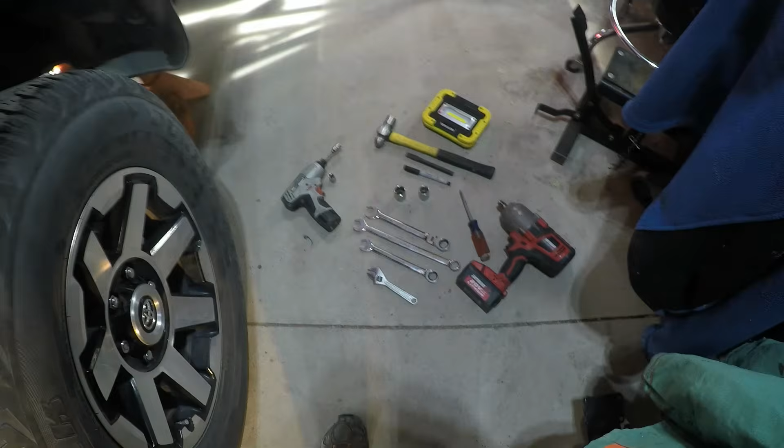Okay, so here's all the tools that it took for this job. 10 millimeter and 12 millimeter 3/8 drive with a little electric impact just to take off the front splash guard, and then a small crescent just to hold the top of the shock, 17 millimeter long arm just to break that upper old factory nut loose, 19 millimeter.

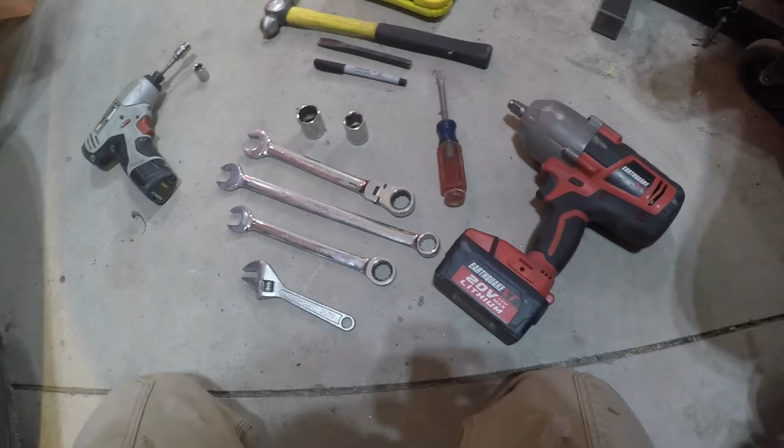This I used to install the top nut on the new shocks because it comes with a bigger nut. 19 millimeter half-inch socket, 22 millimeter half-inch socket. That was just to relocate the snap rings and also to help me maneuver the ball joint mount around to get it to line up when we were putting the ball joint mount back onto the knuckle. And then electric impact makes it nice. You don't have to have that, of course. That just makes removing the bolts a little faster and smoother. And then, of course, some lighting.

This is just for marking the cams for the alignment, so you want to make sure that you're not knocking those out of alignment when you loosen those lower inner control arm bolts. And you have to do that whether or not you're using the spring compressor tool. You have to loosen those bolts enough that the lower control arm will droop out enough to get the whole thing out. It doesn't matter if you're using the vehicle as a spring compressor or using a spring compressor tool, you still have to do that.

And then of course a little chisel just to make a little punch mark on the side of the cam, not on the cam itself, and a little hammer to do that. That's it. And of course you need jack stands and a jack, and a torque wrench.

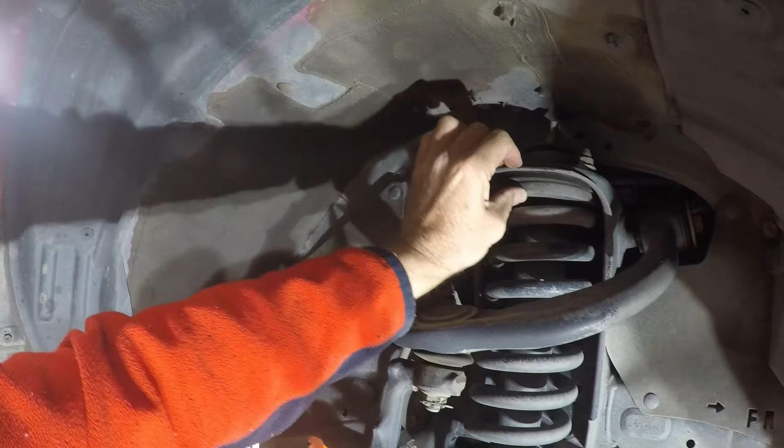We got three 14 millimeters here, here, and here holding the top of the shock tower on. We have the 17 millimeter here that actually holds the tension on the spring. And this is what holds the other side of the spring, of course. This is a 19 millimeter here. It looks like we might have to back it up with a wrench over there. And there's a couple 19 millimeter bolts here.

This is obviously the lower ball joint, right? And this is a ball joint locator, and it separates right here and then right here on the other side as well. So if you pull this 19 millimeter bolt here and this one right here, this whole thing will fall away. So you're not loosening your ball joint, you're just loosening the mounts.

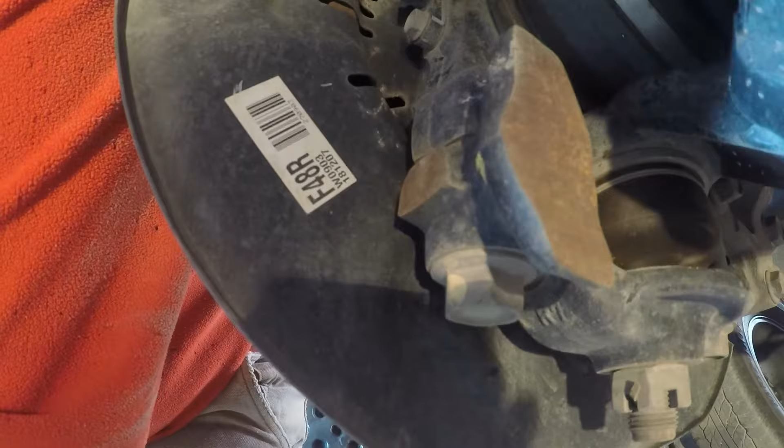And this is how I did it on my 2002 Tundra a couple times when I changed struts on that. We had that truck for 250,000 miles, so we did this a few times. Even changed CV axles once on it. So it was a good truck. And it was still running when we sold it.

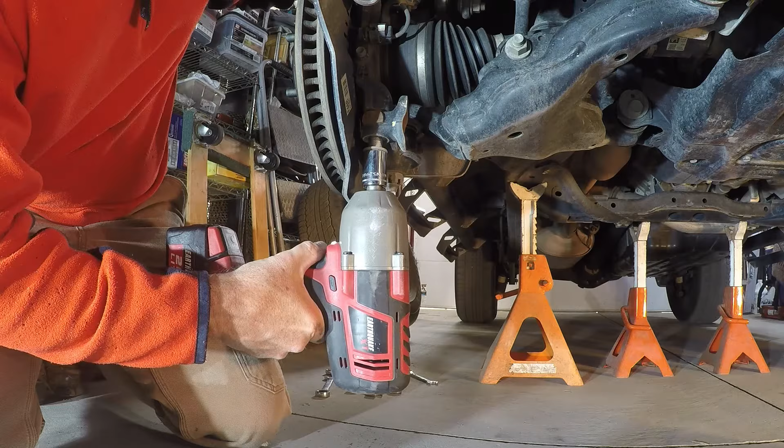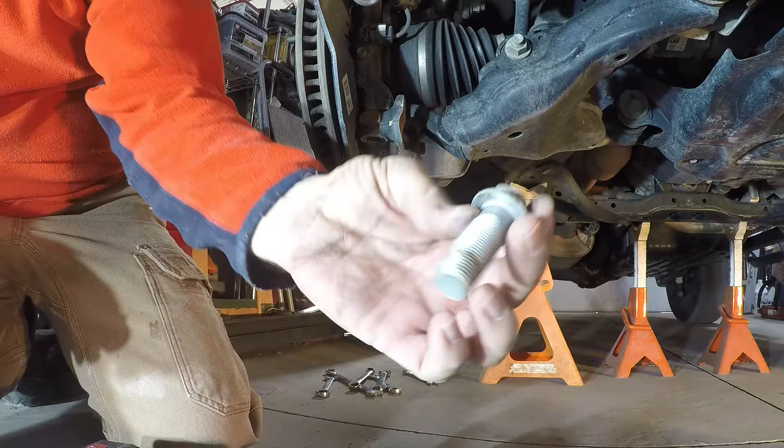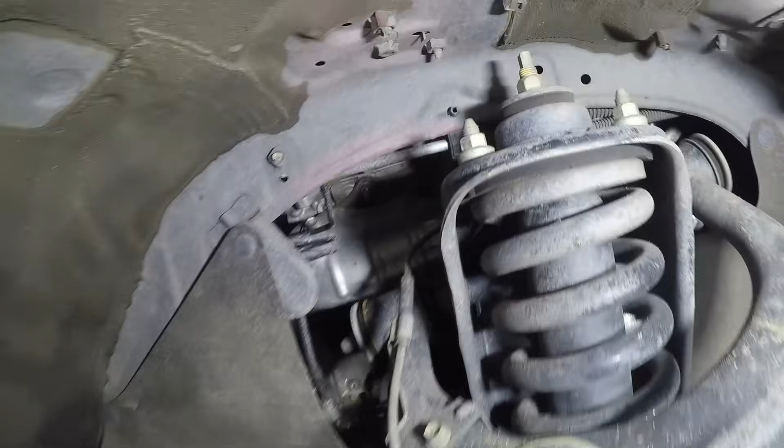Now we're going to put the jack under this before we pull this last bolt out. So now we're going to loosen this top center nut, and hopefully then the jack will be able to lower that arm down to the ground. Okay, so we're using a 17 millimeter long arm and then just an adjustable wrench to hold the top part right there. Breaking it loose with this.

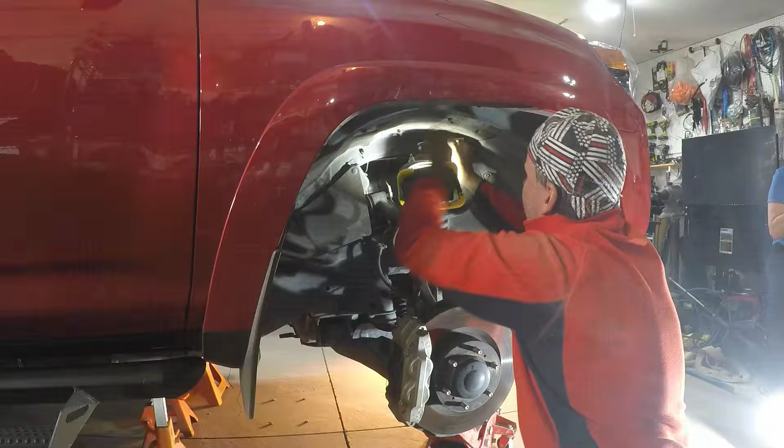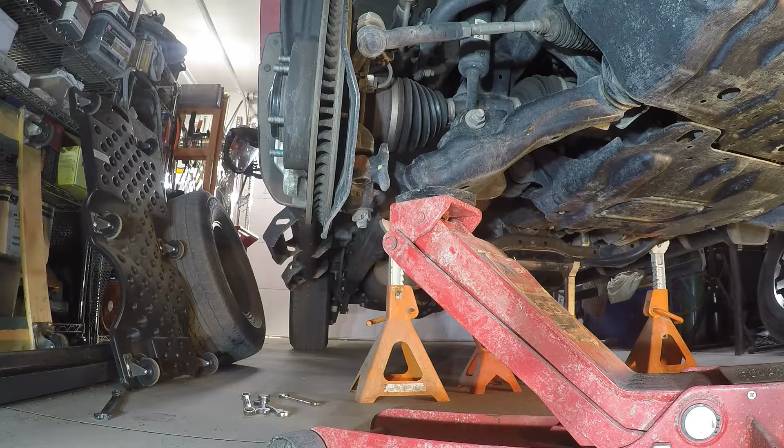Now 17mm ratchet. Now, before we loosen that nut all the way, I want to make sure that the jack is tight against the bottom of this lower control arm right here. So we're going to put a little bit of tension on it. Not going to raise the vehicle off the jack stands, but just enough to make sure that it's tight. Make sure the jack handle is nice and tight so that it won't let off or slip.

Now, the good part about this tells me the tension's off of it, right? Because I'm still loosening it, but it's unthreading by hand. That means the spring isn't trying to pull that down and pull it out. Okay, so that's good. Now what we might do just for safety here is just put a few turns on that. Leave that little bit of gap there. Okay, everything's loose there. We're going to come down here and lower this. And as I lower it, let's watch that gap right there.

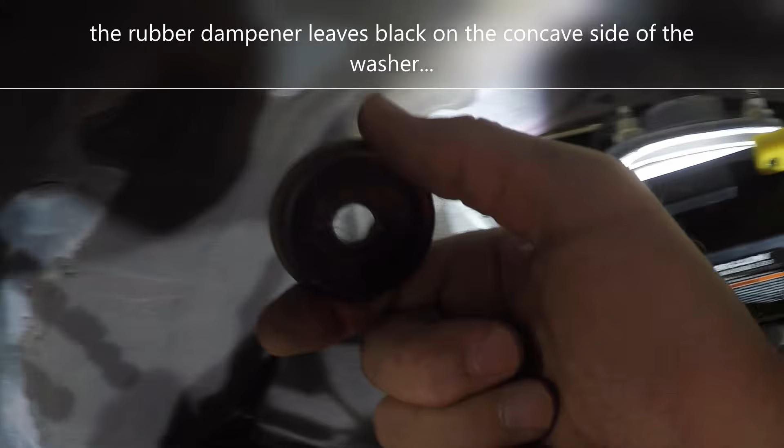Okay, back underneath the fender, we're going to pull this nut off here. Pull the washer off. Sorry, I know it's hard to see with that light back there. Pull the rubber bumper off. Maybe. Okay, it's nice and clean up there now. Okay, here goes. We're going to lower the jack now.

Hold on to your butts. That was anticlimactic.

Spring tension can't be all the way off, is it? No, I'm going to have to loosen these stupid lower arms. I didn't want to have to do that.

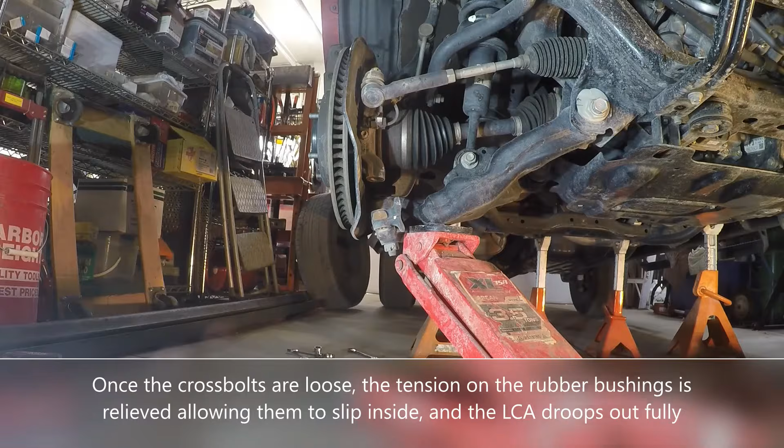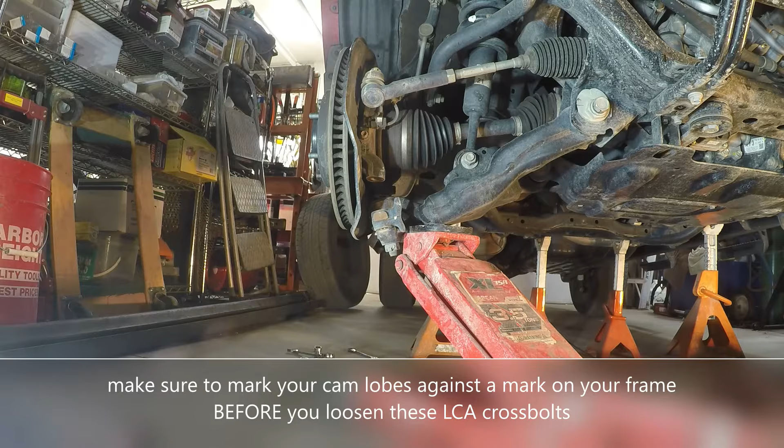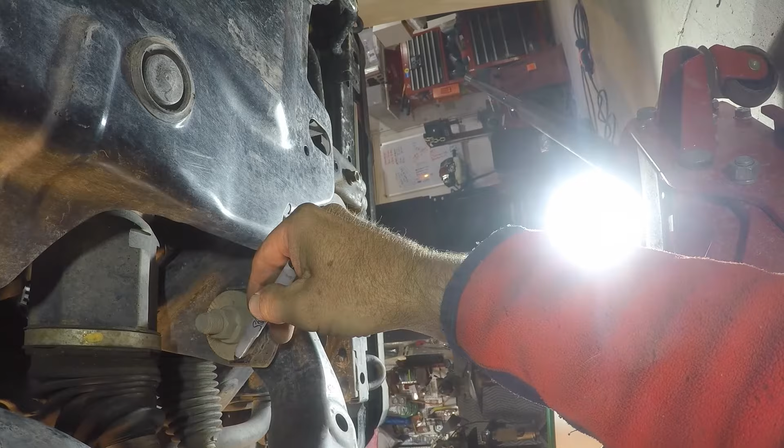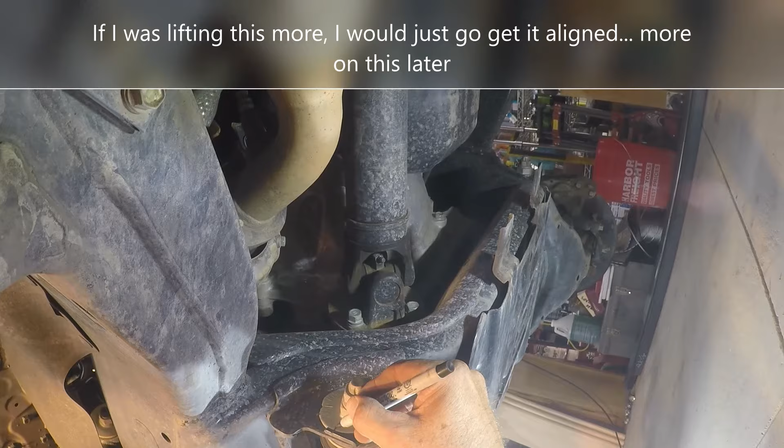Okay, this one actually has a little hash mark you can feel with your fingernail in it, so I just made a little mark in the middle of it and then made a mark here on the cam. Okay, good. Okay, so here we just made a little chisel mark like that because there's no mark on this, and this just makes me feel a little bit better that it can be lined up right with that. Yep.

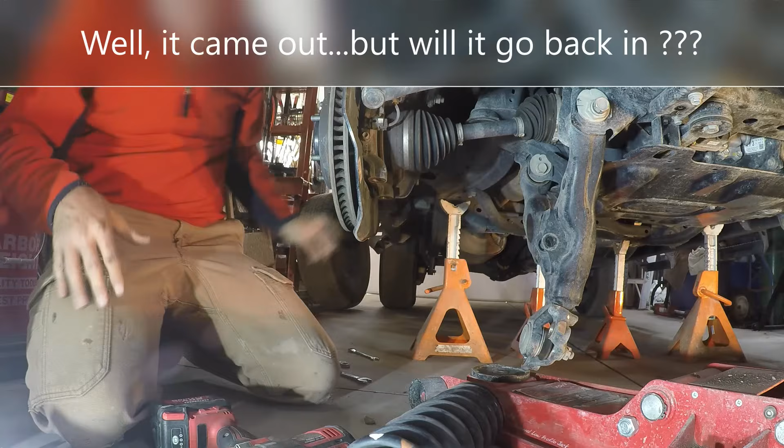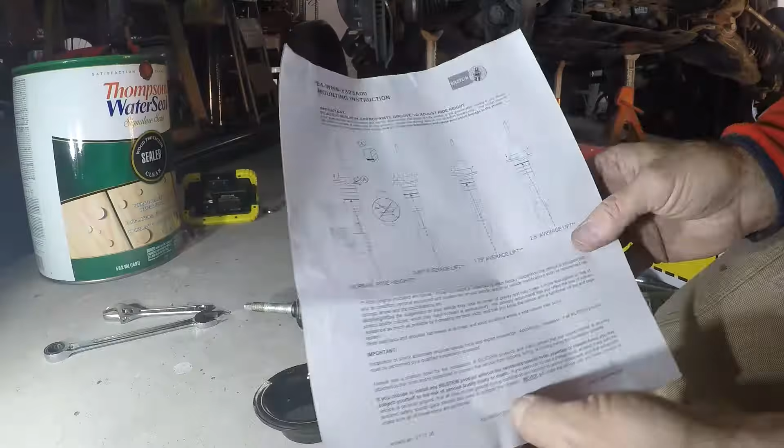Now up here, rubber bumper got left, and we can just leave it there. In the directions here, this isn't telling you how the parts go back together, but you just got to pay attention to how your originals come off and keep the parts in order, and then you can get it back together, because the instructions here don't talk about that.

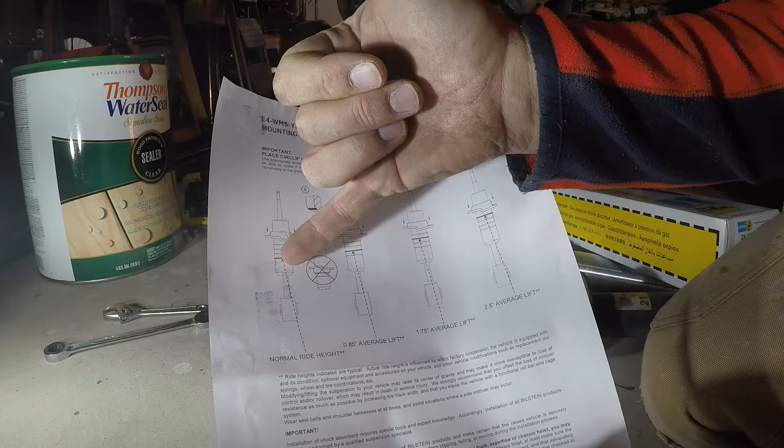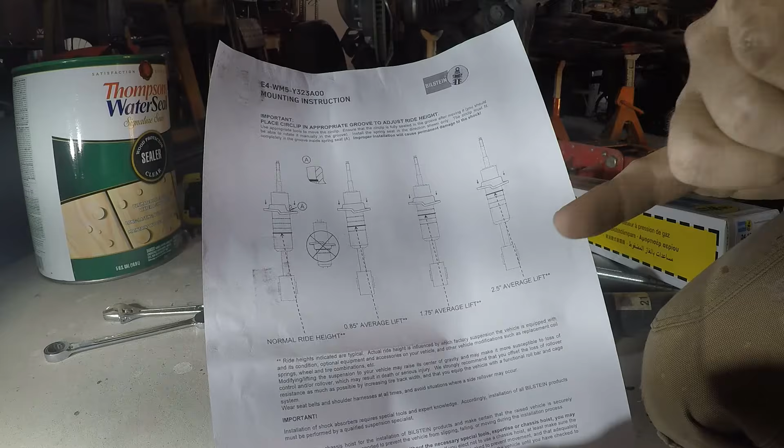So this is just explaining the clip height and what it does to your ride height. So the lowest clip position, of course, is normal ride height. That's your factory shock height. If you put it at the second position, that will give you 0.85 inch average lift. The third position is 1.75 inch, and fourth position is 2.5 inch average.

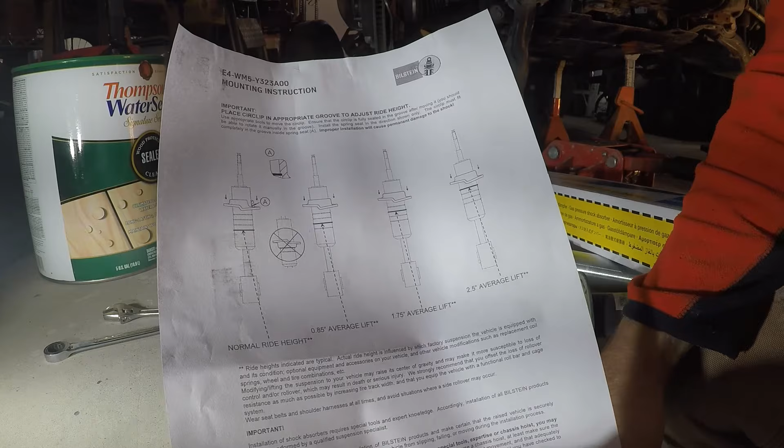So I'm not going to put it way up here. I'd like to. I've done that in the past on my Toyota Tundra. I did that, and it was awesome. It had a good ride height. It actually lifted the front end a little bit higher than the back end. It was kind of pre-runner style. It was kind of cool.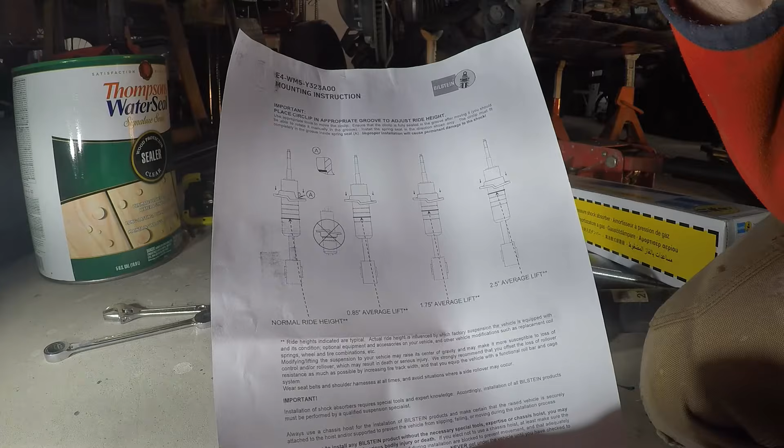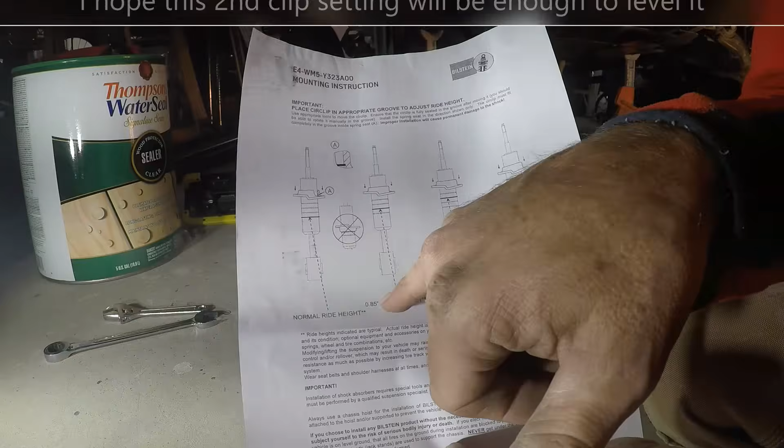But I think that really does increase the angle on the front CV axles. So I think that's going to increase the wear on those, maybe accelerate the wear. That's just my opinion. But I'm going to just put it on the second position here, 0.85 inch, just to give it a little bit of change.

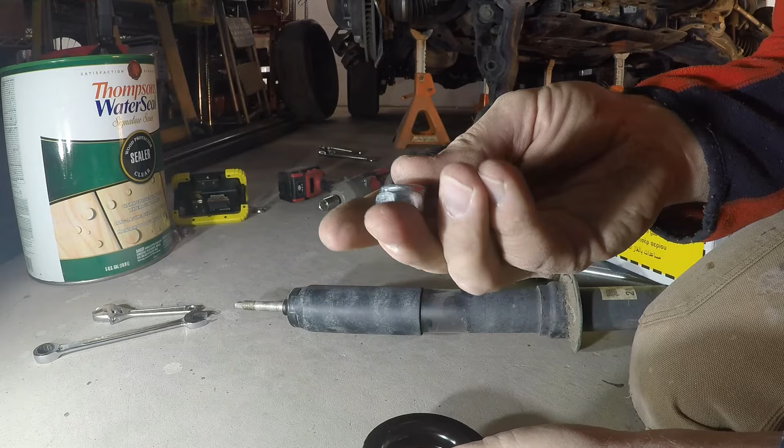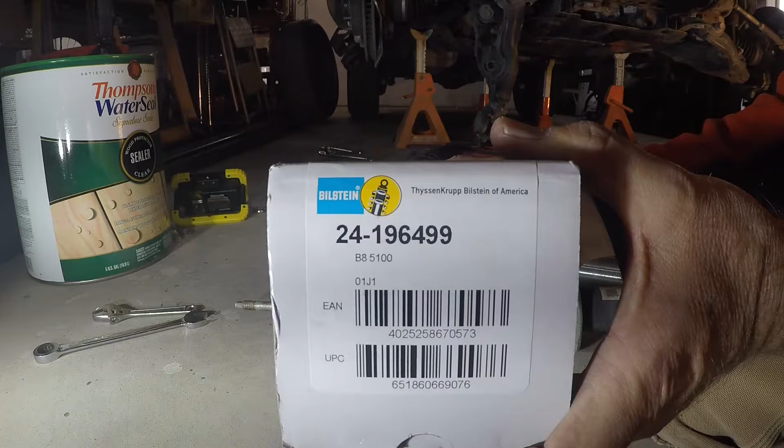Okay, now this is what comes in the bag with the shock. There's a new collar, there's a new nylon lock nut, there's a nylon insert there. That's cool. And this is the part number for this 2019 4Runner, 24-196499. Now we want to be careful here that we don't overbend this or overstretch it, right?

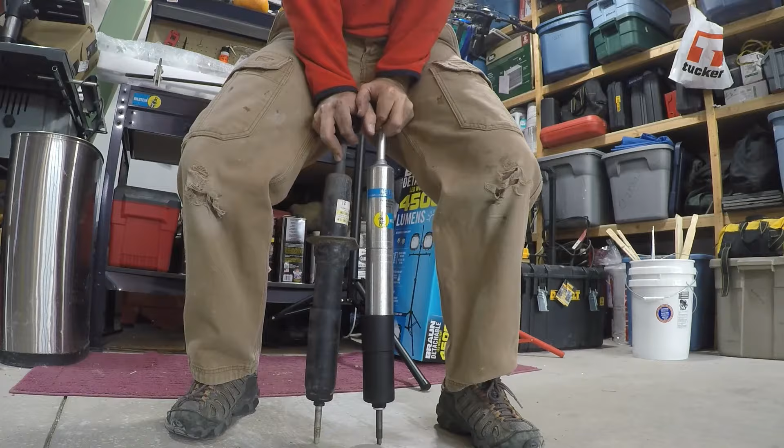Okay, we got it out of the groove. We're just going to slide it up here. The second position. Looks like it's in nicely. Let's just slide it around, make sure it slides around easily. Yep, looks like it's engaged. Okay, good. Okay, let's just see what the rebound is like on these. Okay, the Bilstein's definitely stiffer. They're both bottomed out. Here we go.

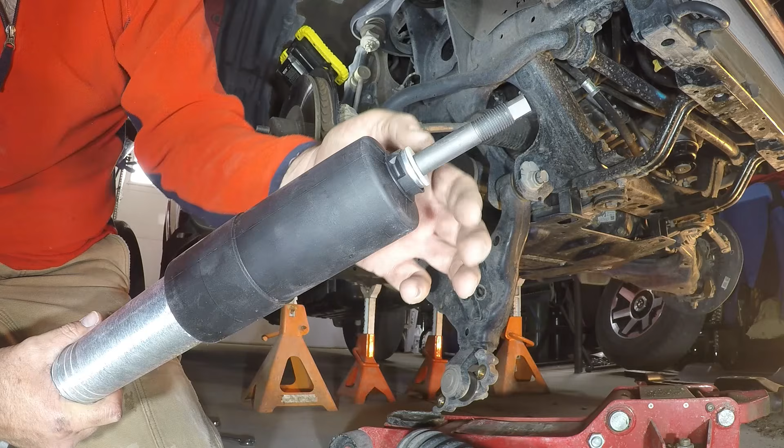Okay, so the factory one took more than twice as long. Good deal. Let's get these in. Okay, first thing we're going to do is put on the new parts. We're going to get rid of this little retainer. Slide this boot off. Okay, we've got our clip set in the second position there. We're going to take this piece, slide it on, wide part down. Okay.

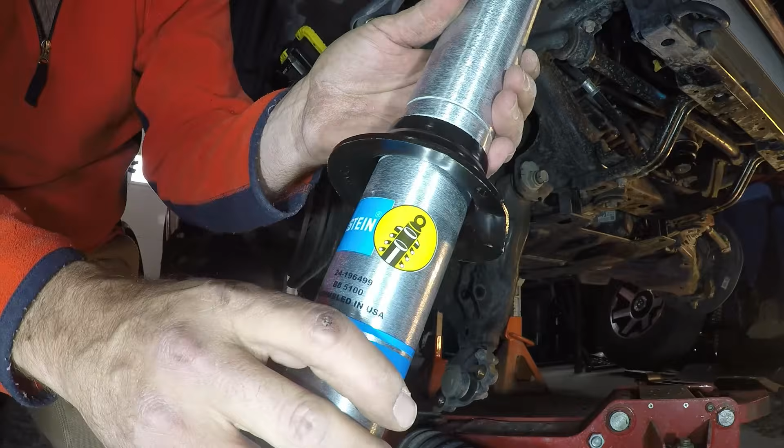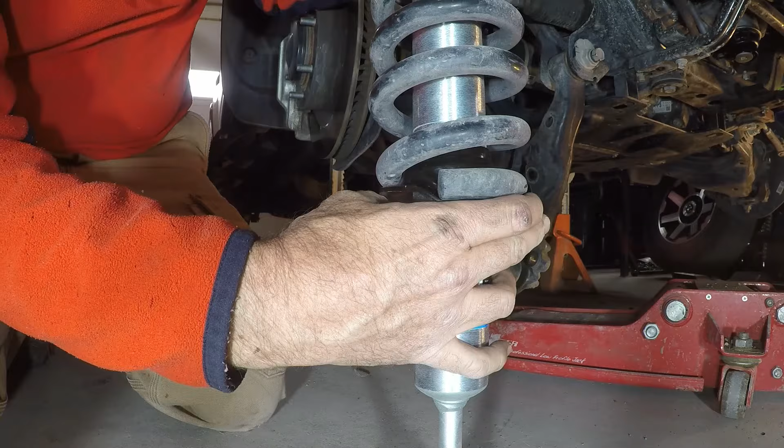Then we can go ahead and slide our boot back on, and then this can go on now too. Okay, we'll set our spring in place. It's important to get this engaged where the spring is lined up with this notch. Okay, like that. We index this down here, but it's probably going to move, so we need to make sure we recheck that after we get it up in position.

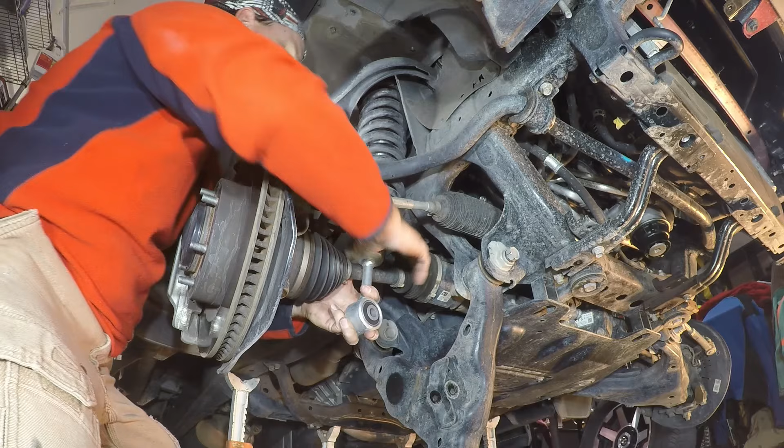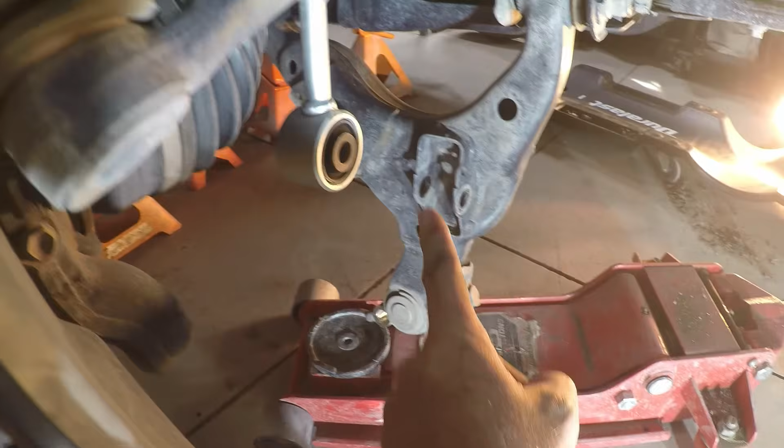You're going to check for the rubber washer. It's still there. It hasn't fallen out. That's good. Okay, so what we did was we just put the nut in the top there just to hold it in place. I can't push it any farther up, so we're going to use the fulcrum effect of the lower control arm down here to push up on this, to get it pushed up inside. Once we get that up inside, then we'll put these on right here. Okay. Okay.

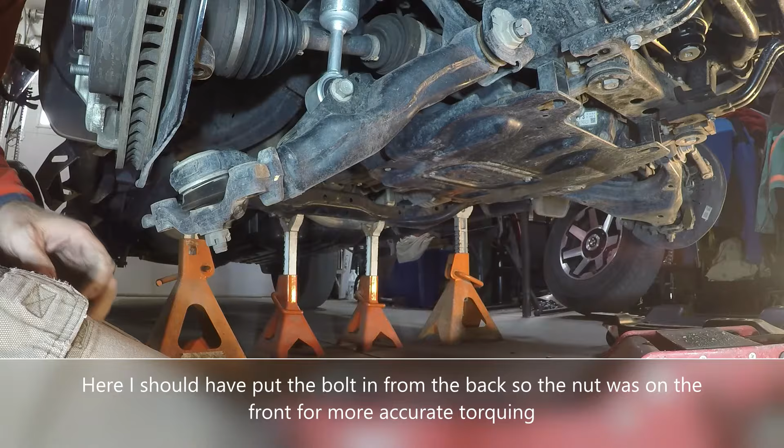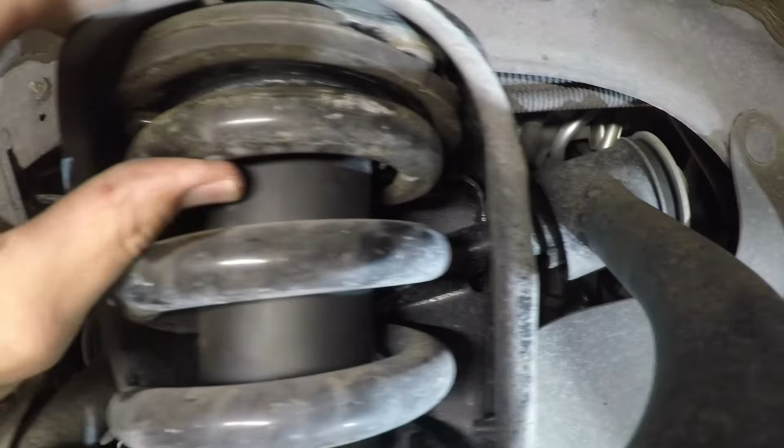All right, now what we need to do is keep this ball joint bracket lined up as we jack this up. We know it's going to line up there, because the top of the shock's already in the hole. It looks like the spring is engaged well in the collar, and going up the spring here to the top, it looks like the spring's engaged well within the rubber up here. And you can see that the nut got pushed up high, so that's awesome. Just what we needed. And we're going to take the nut off.

We're going to put the rubber bumper on. Then we're going to put the metal washer with the concave side down. And then we'll make sure we put the nylon lock nut with the nylon to the top, of course. To get that up there, we're going to snug that down and see if we can't pull this up a little bit further here.

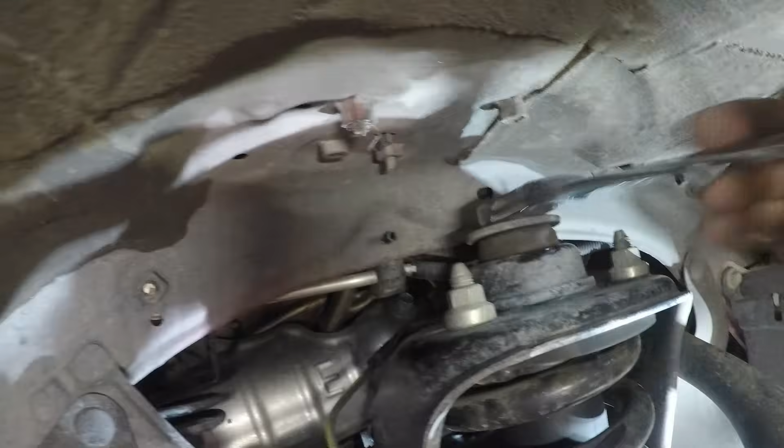Now that could be turning the top, it could be turning the whole threaded shaft, right? But it looks like it's not. That seems to be stationary right there. So we're going to keep running this down. Now it's starting to turn it, so I'll have to put a wrench on it. Okay, so we got the nut snug. This rubber's starting to squish out a little bit here, so we're going to stop right there. We don't want to crush the rubber, right? So it's starting to just bulge out a little bit. We're going to stop there.

And now when we weight the vehicle, that's going to compress the spring up, right? And that might push this up higher. This might loosen up. So after we put the wheels and tires on and put it back on the ground, we need to come back and make sure this isn't loose or clunking. And then when we drive it, we need to make sure when it droops out that we don't hear a clunk either, because that could be this loose right here.

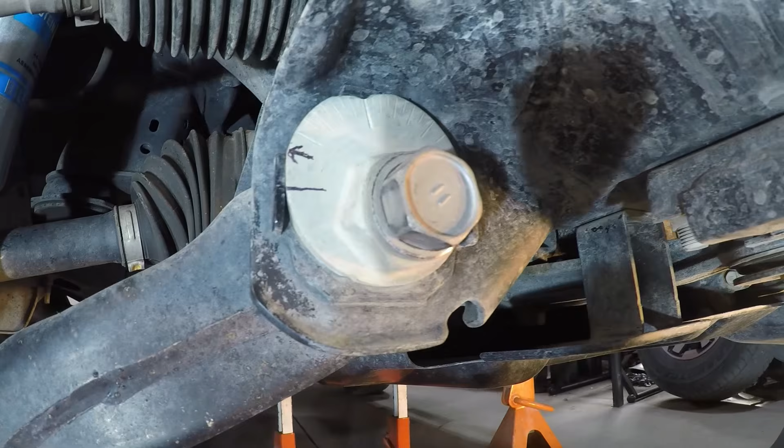The other reason you want to mark your alignment in a couple different positions is because when you loosen these bolts to drop this part right here, you might mess up the alignment. This cam might move. So you want to make sure it doesn't move. So just mark it, and then you know.

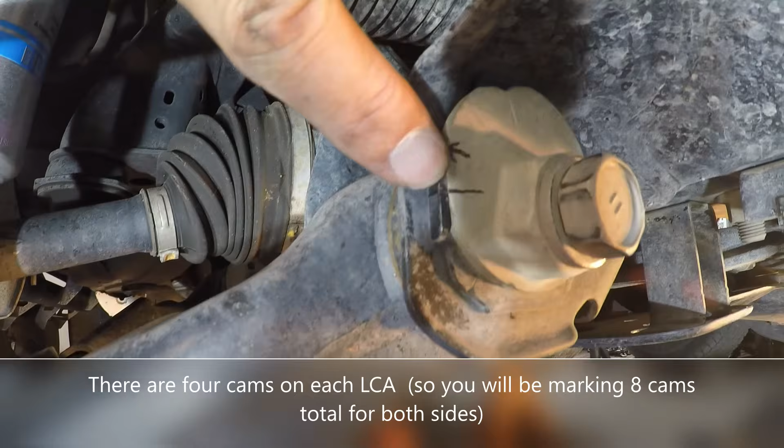It's easy to make a straight line across there like I did and mark a solid piece that you can reference it against. There's probably other indexing marks on here that you could use that would make it a little easier. So I marked a little arrow at the top of that black piece of metal right there, with the line across. Okay, now we're going to jack it up a little bit higher here and get the ball joint lined back up.

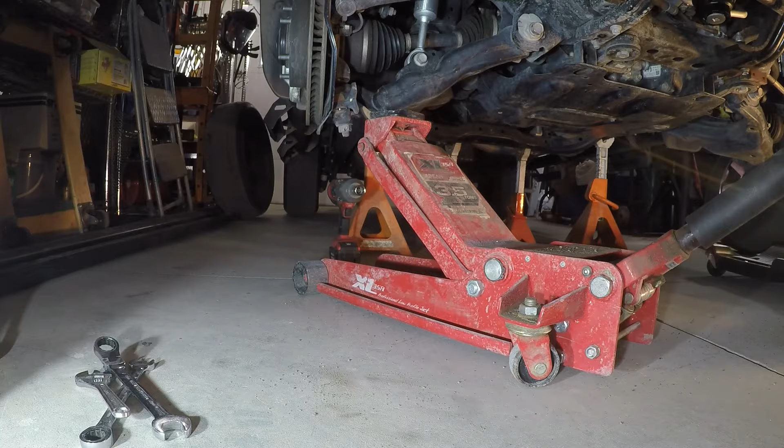Okay, so this moves around pretty easily by hand. It's not quite lining up though. Let's try to pull it that way just a little bit and see if that doesn't make a difference. Okay, that got it.

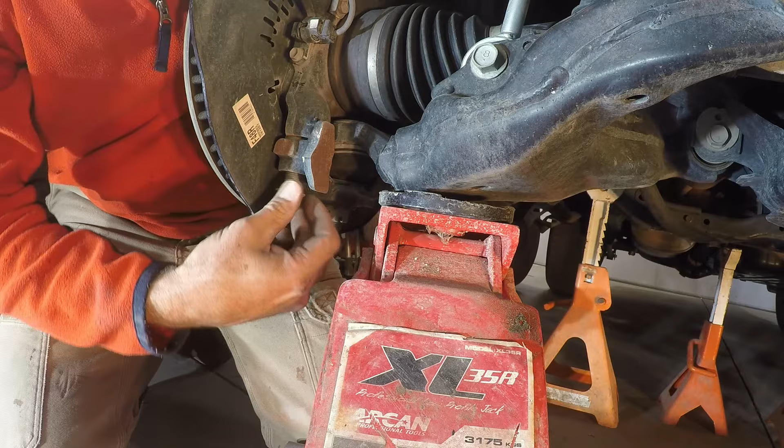Well, we'll just run it all the way by hand. Okay, good. Now we can start torquing stuff down. Okay, so these lower bolts, these two bolts we just put in that hold the ball joint mount in place, they're 118 foot-pounds. So we're going to roll this up to foot-pounds here.

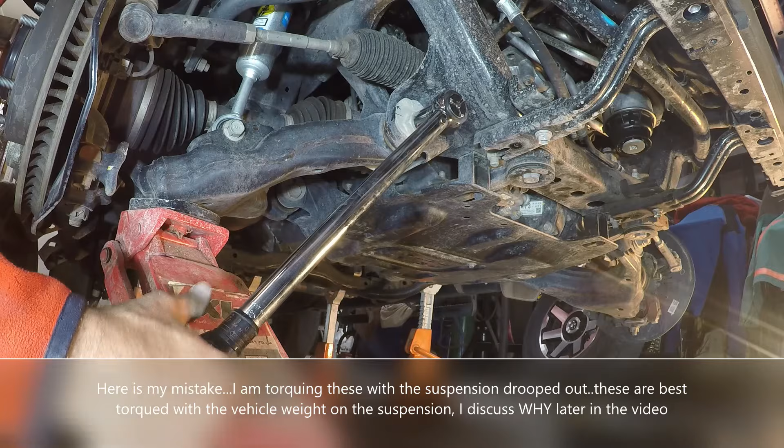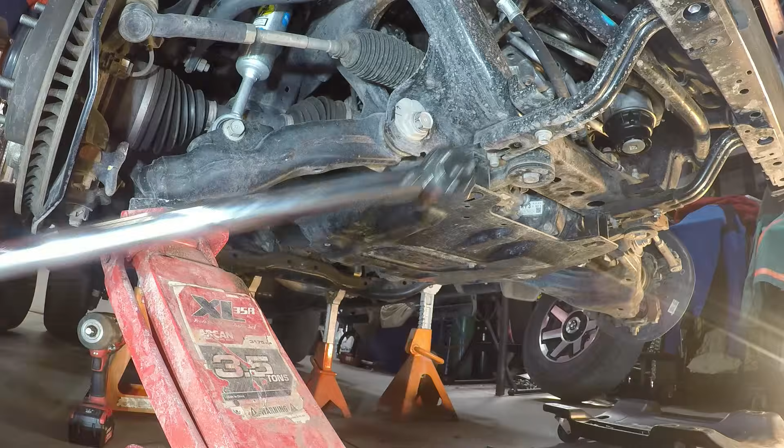Now, a couple potential problems that I can see with doing it this way. Of course, you're taking your own risk if you're going to do something vastly different than the way it's normally done, like I'm doing here. But I'm trying to manage that by knowing that, number one, I'm not going to get this torque to 18 foot-pounds like the manual says.

And the other thing is, when we're looking at the vehicle from the front here, I've got it on big jack stands there and there on the frame. I have these jack stands in the middle that are almost touching the frame that are backing it up should one of these fail and it comes straight down.

The risk is jacking up this side unweights this side of the vehicle as you're jacking this A-arm up. So I could see the vehicle move just a little bit as I was jacking this up to get that nut tightened up there at the top of the shock. And that could potentially shift the whole vehicle and cause it to fall. Okay, so that's definitely a risk, and a falling vehicle is no joke, right? You can die from that.

So this is a risk I'm taking. You're taking your own risk if you're doing it like this. This is just an example of how I'm doing it without a spring compressor tool. Spring compressor tools have their own risks. Some of the cheaper ones are kind of scary, and there's some videos you can see on YouTube of them failing. So that's risky too. Even if you have a professional one, anytime a spring is under tension, you're worried about that, right? So that can happen.

So let's just look at our jack stands here. I don't see them leaning. They haven't shifted. As far as the frame goes, the jack stands are still centered on the frame like I left them. And so I feel safe about that, but you got to be careful.

Okay, so I got to double check everything. I'm going to do the other side, and then I'm going to come back to this side and retorque everything. Just put the torque wrench on with the torque specs just to make sure that I'm happy with everything I took off. So I've got 2 bolts down here I took off. I had the bolt here. I had these that I loosened, that one and this one, those cams that I marked there and there. And then this one I'm having to hand tighten right here because I didn't take this part of the upper shock tower off. Okay.

So once I'm done here, I'm going to leave this wheel off for now. I'm going to come back over, retorque everything, make sure that all the bolts that I took off, I'm double checking and triple checking to make sure I torque them to the correct specification, and also that I didn't miss anything, okay? That I didn't leave anything off, that nothing's out of whack, out of alignment. So we're going to come back and double check all the torque specs.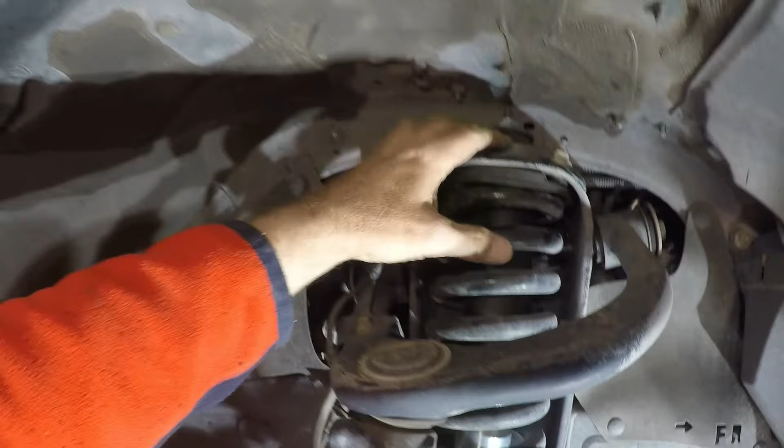Obviously I can't check this one, but once I put the vehicle weight on the ground, I want to come back and make sure that this top nut isn't loose here and that the rubber hasn't been unloaded too much. So we're going to be careful that we don't over torque it or under torque it. We're going to tighten it so that the rubber just begins to squish out, so that there's tension on the rubber, but it just begins to squish out.

What this means is this will loosen over time as the rubber gets old and cracked, and so this will start loosening, and you may hear a popping noise in your suspension as you're bouncing over a speed bump or something. And this is something to check, because the threads on the inside of this shaft here, where this nut goes on, if these rubbers start to decompose over time and they kind of squish down, this can get loose, and those threads can make a knocking sound as they go up inside this little piece of metal right here, or a popping sound.

So that's something that happened to my Dodge Diesel. It started popping and making a noise, and I was all over the suspension thinking it was a suspension noise, and it turned out to just be a loose top shock nut. So that was super annoying.

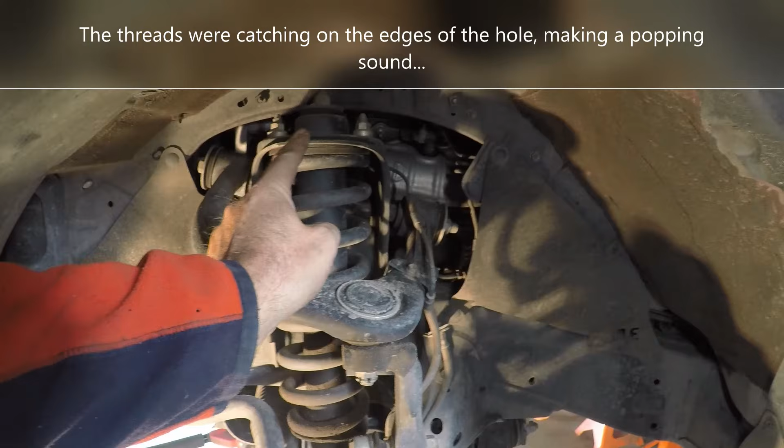Oh, and that loose top shock nut was on my factory shocks. But one of them had gone bad like this one had, and it must have had a lot of resistance, so it started wearing out the rubber. The rubber started taking a lot of the up and down stress. And then eventually the rubber started breaking down, and then the shock shaft started moving up and down inside this tower right here, and then yeah, started making noise. Okay, let's see if we can go down a little bit further here.

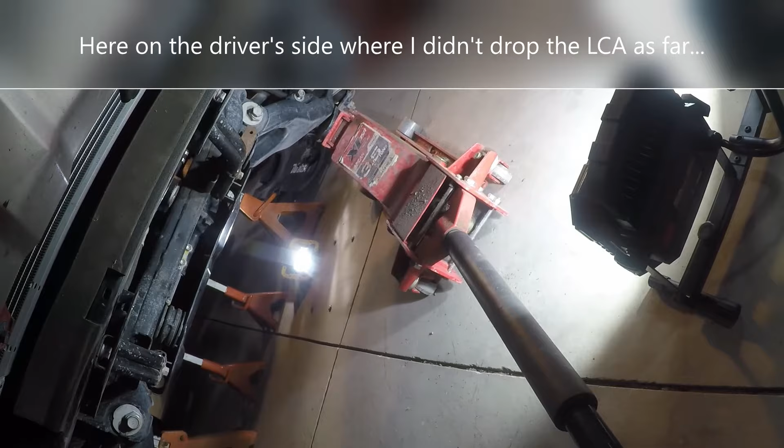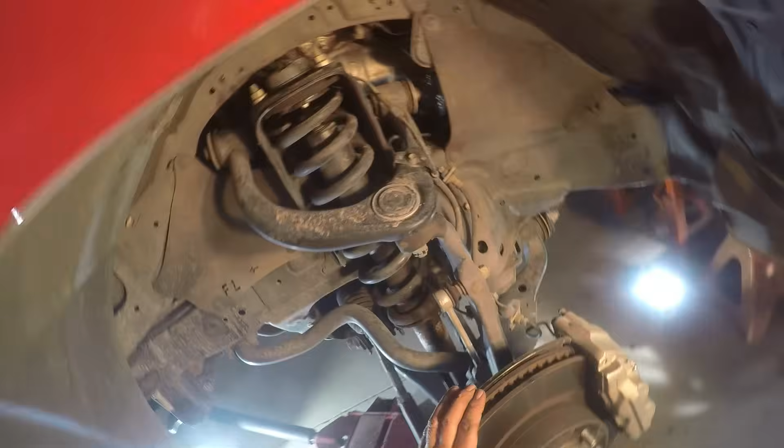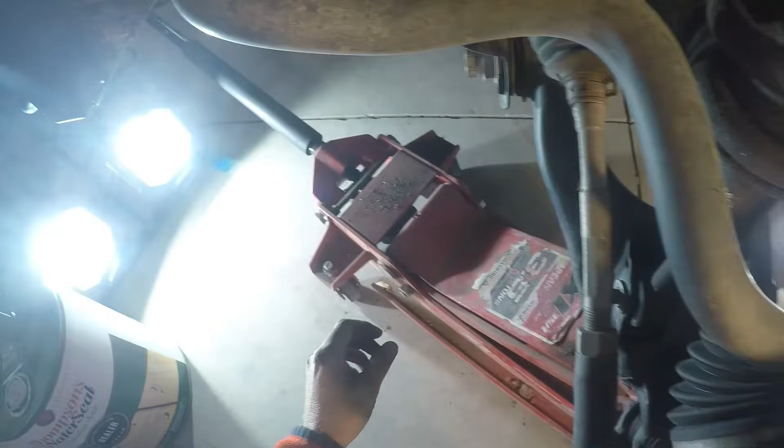Okay, so it's pretty low. The weight is off the spring. Okay, so we're just going to stop there. Make sure that's tight there. Good. Let's pull this nut off. Let's pull this bolt out. Okay. And now, let's see if we can pull the shock out.

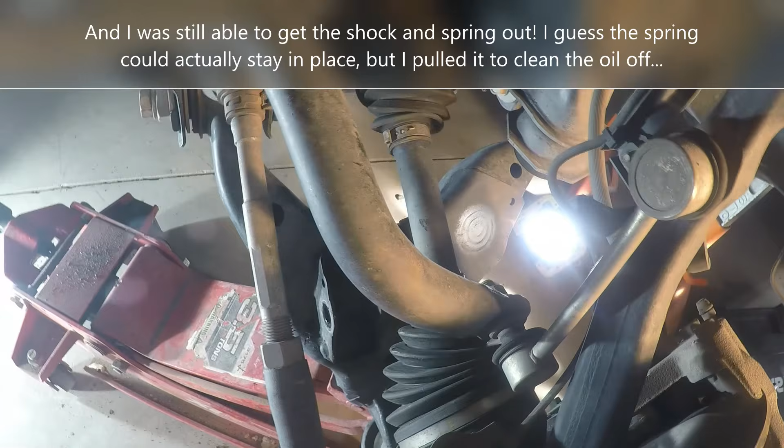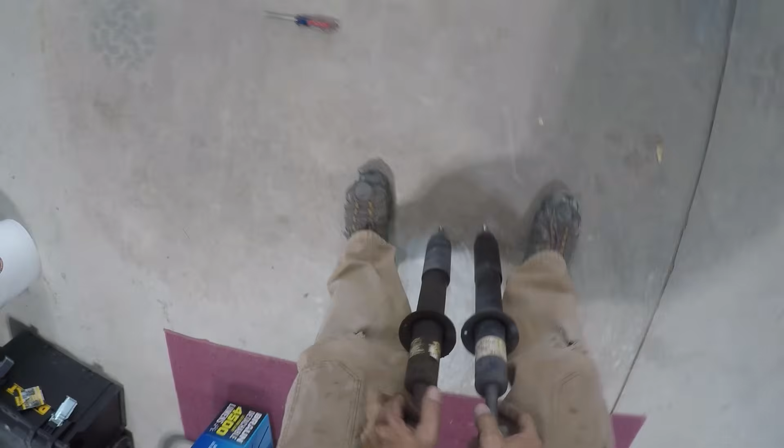Okay, good. There's the lower washer. There's the spring. We might wash this a little bit since it's a little greasy. And we're just going to check the CV boots here while we're here. Make sure they look okay. There's no splits, cracks, grease coming out. There's no oil leak from underneath there. Okay, this is going to be upside down. You can see the shock that's blown, and it's a little easier to compress.

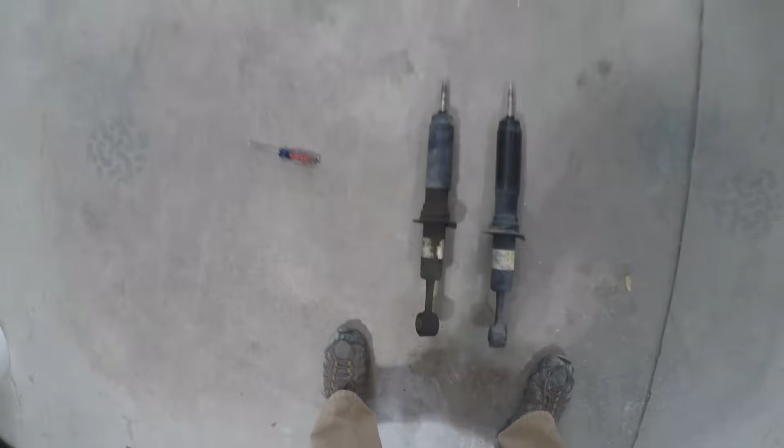And those are awfully slow, aren't they? Okay, well I guess I should have measured it on the front end to see how much it really did raise it, but the bottom line is measuring it doesn't equate looks. So the gap between the tire and the fender is the same now, or almost the same, and I'm pretty happy with that. I think that's a good compromise. It shouldn't stress the CV axles too much.

So I think if I do this again, I would do it a little bit differently, where I would leave one tire on and just jack up one side at a time, emergency brake on, keep this other tire on the ground. Jack stands under. If I have an extra jack, I'm going to keep it under there on another hard spot. So if it does slip or fall, I've got several things under there to keep it from falling.

So I'm not getting under this vehicle except to mark the cam lobes for the alignment to make sure the cam lobes stay in alignment. That's the only reason I'm getting under this. So lots of jack stands, redundancy, extra jack is always in order. And keep that other tire on the ground. Do this one. Hopefully it'll droop out enough. I think it probably will because I didn't have to drop it super far.

And you can get one side pretty high up in the air while keeping this other tire on the ground. And then doing that one side, getting it all done, tire back on the ground, torque lug nuts, and then go back to the other side. And I think I'm going to do that in the future. Keep one tire on like that.

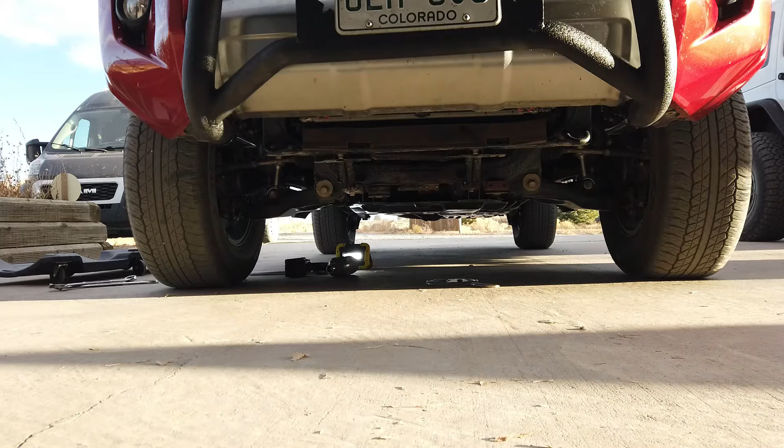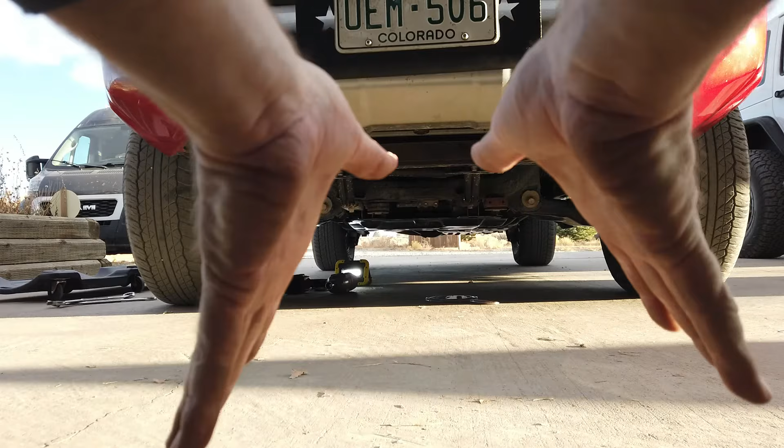So my ASE mechanic buddy was telling me to make sure to not torque the inner lower control arm cross bolts with the vehicle in the air, with the lower control arms drooped out like this. The vehicle needs to be on flat ground with the suspension in the rear and the front evenly weighted, and then torque them down.

Okay, so what I'm doing is I have it on level ground now. I'm loosening the bolts. I'm doing the passenger side first, and I'm loosening them enough to make sure they're loose and all the tension's off of them, and then I'm tightening them back down. Now it's important to mark them, and I'll show you why. It just saved me.

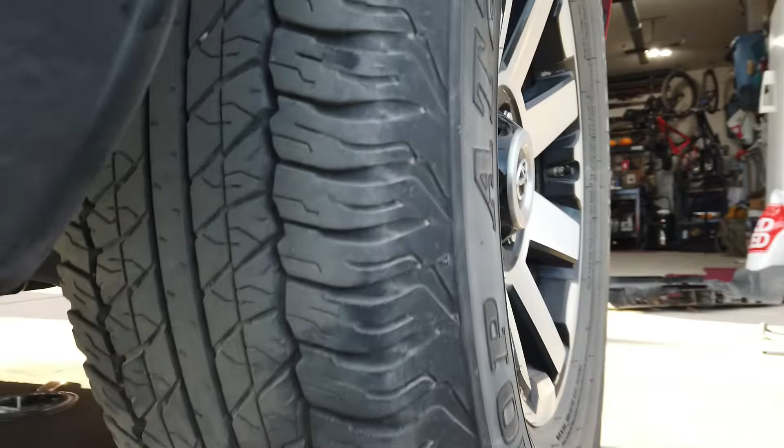And honestly, I'm not going to do an alignment. This has 30,000 miles on it. We're probably going to be changing these tires in the next 10,000 miles anyway, or 15,000 miles, maybe 20 at the very most. So if they do wear unevenly, I don't care too much because they're going to get changed soon anyway. So I'm just trying to maintain the alignment that I have.

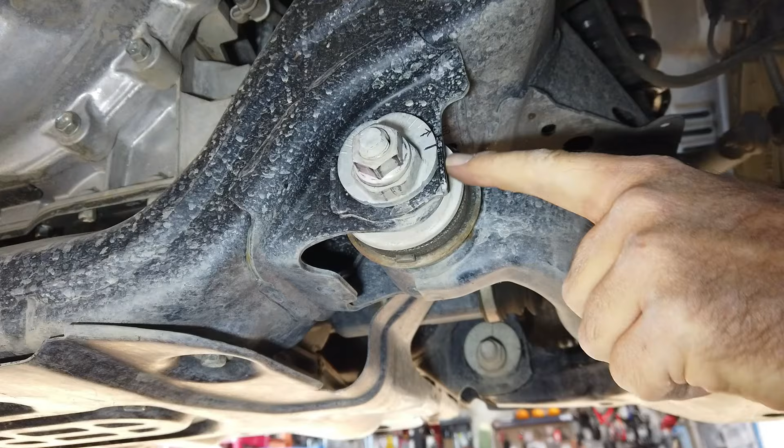And so right here, my black mark is right at the top of my fingernail, right there. And you can see the black mark on the cam. So it moved up when I loosened this bolt right here. Okay. So now what we're going to do is realign that. And the alignment may not look straight from where you're at. I'm looking straight onto it, but the camera's a little bit lower than where I'm looking. So we're just going to bring the cam back down. Well, that's a little too far, isn't it?

Almost there. Right there. Okay. So my line matches my line. My arrow matches the top of that piece of metal right there where my fingernail is. So that's perfect. Now I'm going to snug this down. I'm not torquing it with this, but I want to put some tension on it to hold it in place. Then where I marked these inner ones earlier, I'm going to check with my mirror and just make sure that my alignment hasn't moved there.

Yeah, it's perfectly lined up. My black mark matches my black mark. So the inner cam is good as well. So I can go ahead and torque this one down with the torque wrench, and then we'll move on to the front. So I loosened the front one and the back one. I don't know if I can do them individually or if I need to do them both at the same time, but I went ahead and did them both at the same time. I loosened them both just to make sure. I feel a little safer doing that, and then we'll go ahead and get this one torqued down, then we'll move to the front one, make sure it hasn't moved, and then get it torqued down.

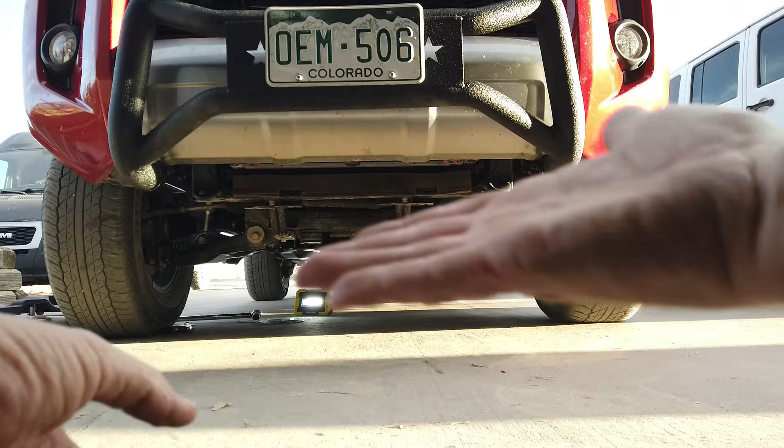Okay, so the reason he said to do that is because if you torque the lower control arms with the front end up in the air and the control arms drooped out at the maximum of the shock travel, then the cross bolts, as they squeeze in, compress the rubber bushing, and the rubber bushing expands inside the lower control arm sleeve, I guess. I don't know what word would be better for that, but it expands inside there and sort of jams it. And that limits the articulation of the control arm, so that as the control arm goes up and down, it actually twists the rubber inside and deforms the rubber. So the rubber isn't actually turning inside. It's not turning on the bolt, or maybe a little bit, but not very much.

But we know that because when we went to droop out the lower control arms to take the shock out, we had to loosen those cross bolts to get it to droop out fully. And so that explains why that's happening. So if you torque them down with the control arm fully drooped out, it jams the rubber there, binds the rubber, and makes the suspension a lot stiffer. And that may be why people are saying it takes a few weeks for the shocks to wear in and start feeling smooth, because it may actually take the rubber that long to work its way around. And maybe it never works around, or maybe it does.

I don't know which one is the truth, but the idea is to torque them on level ground, with the weight of the vehicle equally on the front and back axles, and then torque them down. So then it'll have range of motion going up and range of motion going down, basically like it's supposed to. Okay, so that's what we're doing. We're retorquing this. It's a little bit of a pain, but it's the right thing to do.